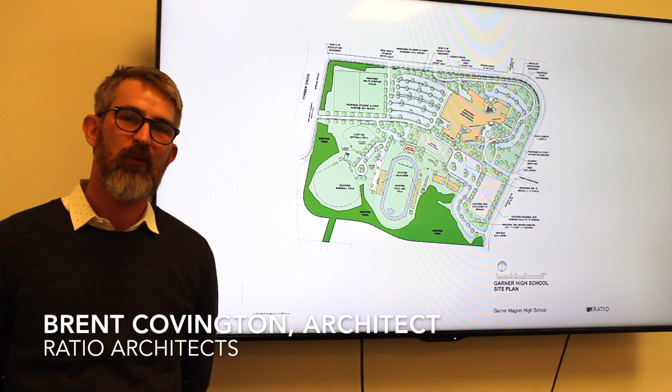My name is Brent Covington, I'm with Ratio Architects. Ratio Architects was asked to design a renovation and addition to Garner Magnet High School, which was originally built in 1967.

We're standing here at what used to be the back end of the school and is now the new grand entrance, showing in the red brick features the 4-story classroom wings, and where they meet in the grey metal clad areas, those are the commons areas on each floor.

For those familiar with the campus, originally you would actually enter the building from here—the main entrance was here. We redefined that entrance so you're actually entering from here, and then we redesigned a main courtyard to receive all the students and guests.

Now we're inside the main entrance with the security lobby being formed here, and behind us on the other side, the entrance to the administration office for the main entrance.

So this is our first floor plan, which is rather expansive. Generally speaking, the footprint of the classroom tower runs in this fashion. That's your main entry. The original entry was actually coming down here from the north.

So we redefined that entry sequence. But what we put in its place, where the entry sequence was, is we expanded the dining area to where the original lobby was, to give a lot more space for larger groups to eat.

And then we also provided an outdoor dining courtyard with a large canopy right here, so you can actually have some food service for the students on nice days.

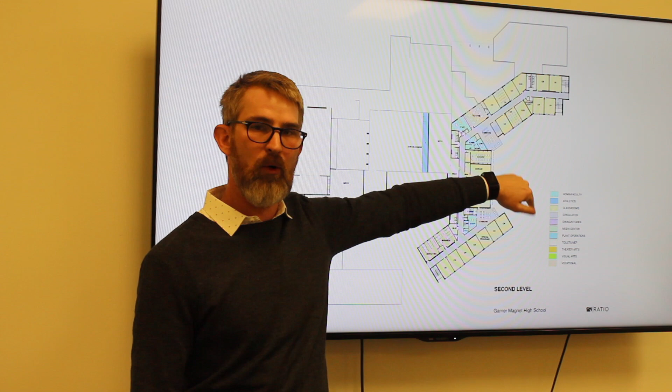Moving to the classroom tower, you can see these common areas. We have both a north and south common area that then focuses in onto the main courtyard, and that is also where you'll have some of your salvaged gym wall features, mainly up here.

We're on the second floor now, directly above the main entrance, in one of the new collaborative learning areas. It's well lit by daylight and has locker spaces recessed into the walls, and will feature reclaimed gym flooring from the original gym floor.

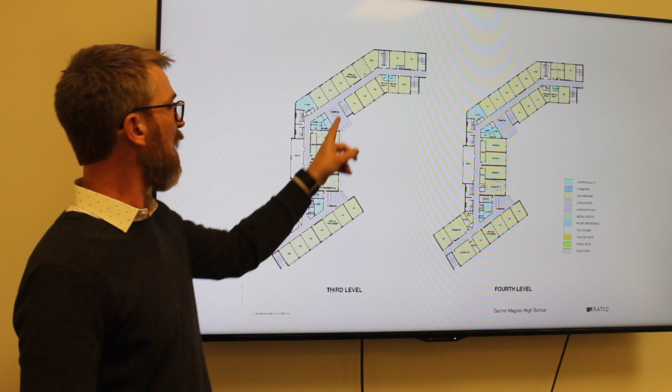As you move through the third and fourth floor, you can see a translation of the solar angles to make sure we're getting natural light into all teaching spaces. Then you have a north and south common area for congregating and for students to get together to meet after class for clubs or for project work.

Here we are in one of the standard classrooms. This one is almost finished with its paint finishes. We have a large amount of daylighting, and on this end, the teacher wall, which will have the new standard of 70-inch monitors.

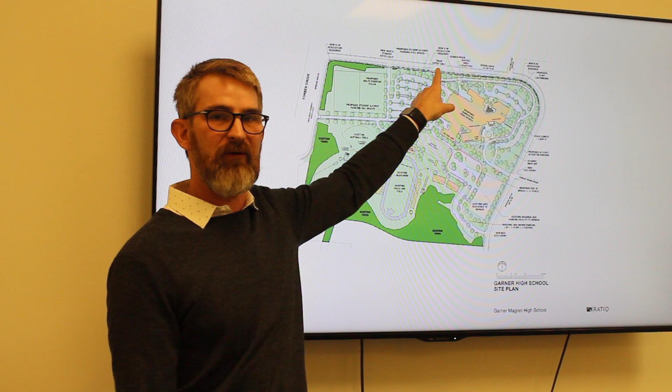How you navigate around the site: you have Timber Drive, and then the main connection in terms of vehicular traffic starts here, with a long queuing line that winds its way all the way over to the main campus and main entry and drop-off area. You have bus parking right here, tennis courts right here.

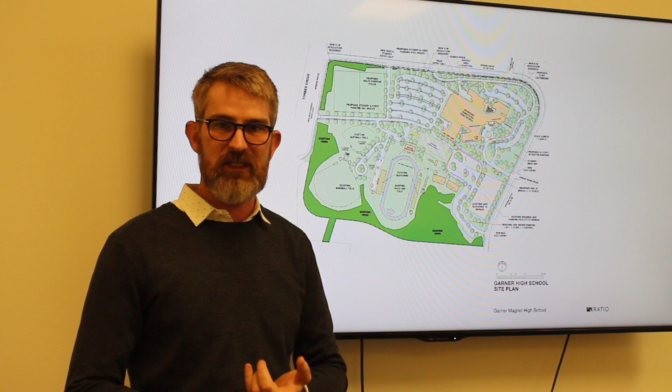We're maintaining two modular SIPS buildings in this location to accommodate Garner's very large existing program, including their ROTC program and their fire safety.

On the western side of the project is Timber Drive, which is also the entrance for the student car park, just beside us here, adjacent to the new auditorium structure which we described. Beside us here is the entrance to the student entrance and the event entrance for the new auditorium.

One of the more gratifying parts of working for Garner is everywhere we turned, we would find alumni and people within the community that were very directly connected with the school and really identified with it, with a true history. While we wanted to transform the school, we didn't want to lose that history.

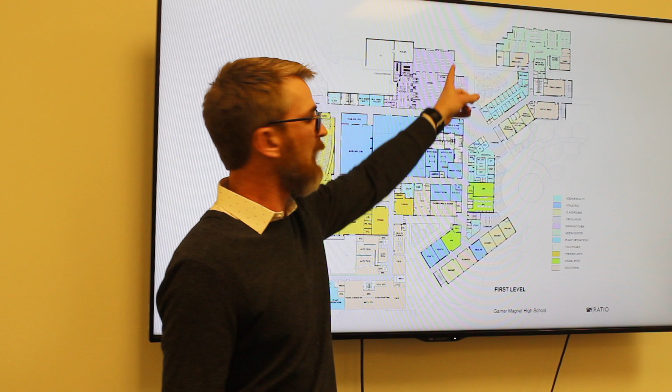So instead of taking a very rational line across here and demolishing this portion of the building, we decided to push the line to encapsulate one of the existing terrazzo seals. So when somebody steps into that building who may have attended school, say in 1970, they're seeing that same seal that they crossed over every day when they were going to classes.

Here we see the old school logo, created originally in terrazzo, which is being retained as part of the new project against what was the old entrance, and now will be part of the dining area.

Another thing we did is we salvaged a good portion of the main gym floor, and we used that as a series of unifying feature walls in those common spaces in the classroom tower.

As you step into right in the main entry, you will be flanked by, to your left, the center logo of the main gym, and then to your right, some additional gym flooring that runs along here, and then subsequently up the classroom tower.

We also use that gym flooring as a wayfinder or signifier on how to get to the main gym during game day. So there'll be flooring at this location and flooring in this location.

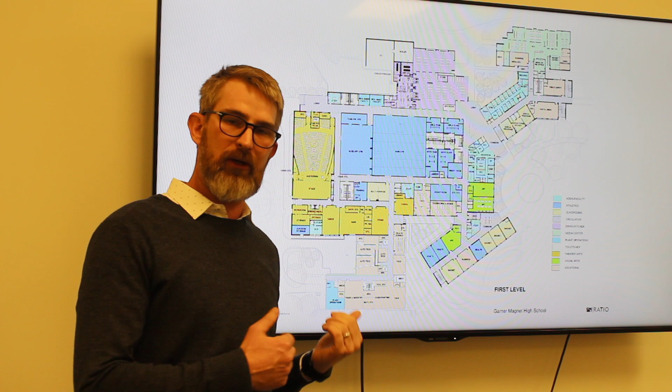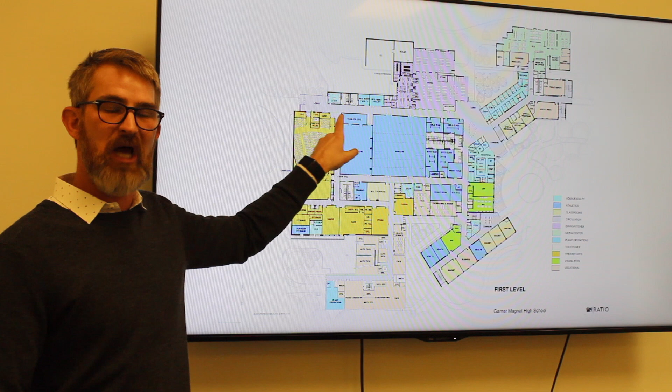We also wanted to complement the theater side of it, where a majority of the population will be coming in for game days and performing arts events. So you have some additional salvaged gym flooring over here in a feature wall that wraps around where we'll have a playbill display and then concession stand.

Behind me now we see the original football stadium, which has also been renovated with its various outbuildings. The project is running well on schedule, and we're looking forward to welcoming students here in August 2018.